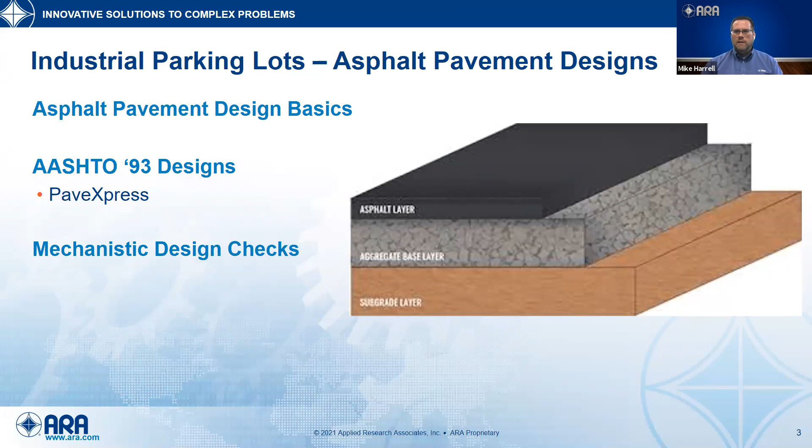And then we'll talk briefly about some mechanistic design checks that can be done to further ensure that the pavement structure is actually being designed properly and is ready for the loading that it's expected to carry during the life that it's expected to provide.

So we'll start out with a light duty example, a typical vehicle parking lot for employees at a facility. You'll see some screenshots here from the PaveXpress program available on the web, with no cost to use it. You can set up a user profile and store projects there if you want to work through them, and select different types of designs you're intending to execute, the locations for them, when you expect to finish construction, and what type of project you're actually trying to design.

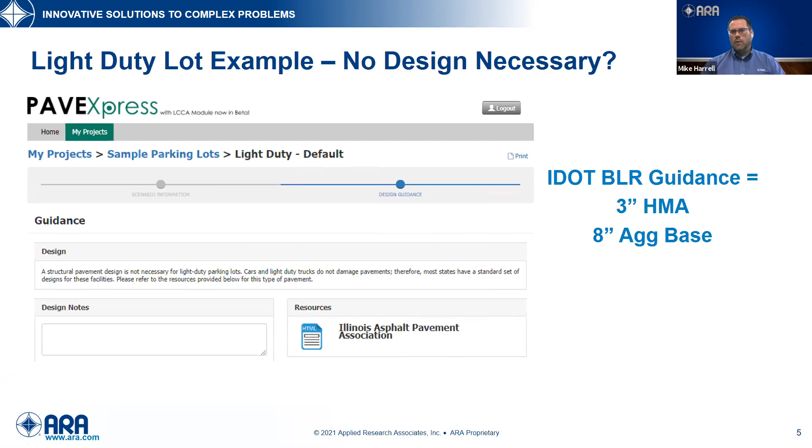So here we've selected a light duty parking lot, and the answer comes back immediately saying a structural pavement design is not necessary for a light duty parking lot, so you don't have to really worry about that. They're implying you typically just take whatever light duty lot design you had last time and push that forward. A lot of times, at least in IDOT, the Bureau of Local Roads guidance would suggest a 3-inch asphalt over 8 inches of aggregate base. What we've seen with industrial lots is that this has been co-opted for those as well, and no one's actually walked through the process of designing the heavy duty parking lot for the heavy duty vehicles it's intended to support. And lo and behold, you have a massively under-designed parking lot.

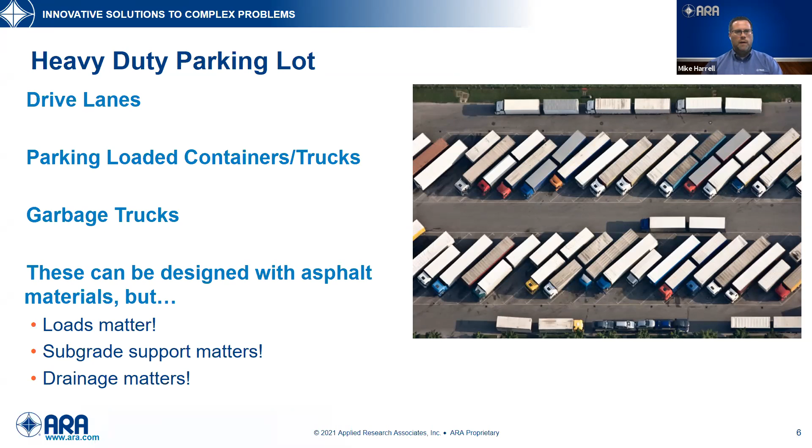So how does the AASHTO 93 procedure work? I would guess many people are familiar with this. In several states, this design methodology is actually being phased out in favor of a more mechanistic pavement design approach that takes in a lot more site-specific conditions, but it's also a very rigorous process and uses some pretty advanced software to pull those designs off. The AASHTO 93 procedure is still relevant because it's a very straightforward, fairly simple process to come up with a structural pavement design, and by and large, in comparisons in several places, the AASHTO 93 designs are actually very comparable to the ones you would come up with in the mechanistic approach.

So it's not a 100% match, but for the most part, they're pretty comparable.

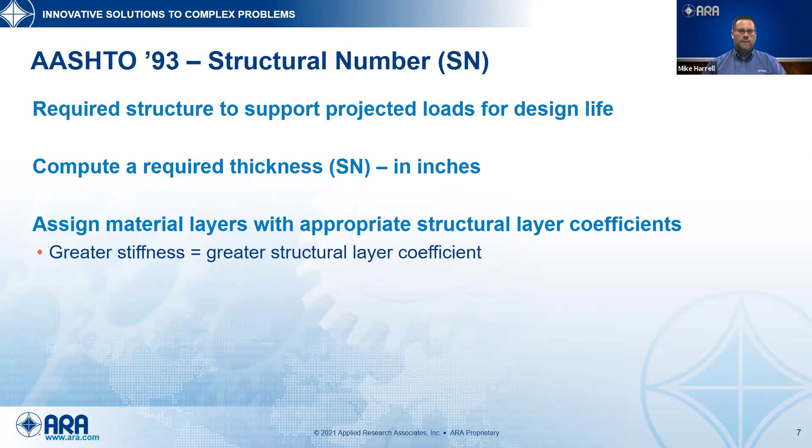So the AASHTO 93 procedure basically specifies something called a structural number. It's the required structure to support projected loads for the design life of that pavement. It requires you to compute a required thickness, which is the structural number, reported in inches. Then you assign material layers with appropriate structural layer coefficients, and those coefficients increase with stiffness of material. So a subgrade soil does not provide you any real structural benefit, an aggregate base provides some structural benefit, and a hot mix asphalt layer presents more structural support, and therefore the layer coefficients increase with stiffness.

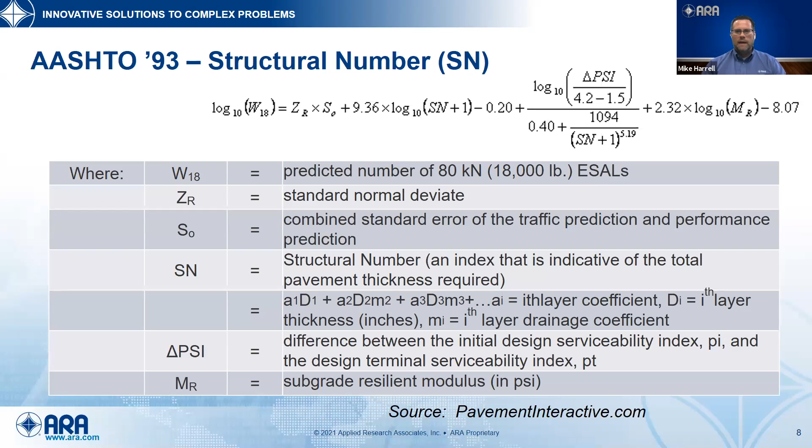So what do you start with? You start with trucks. So you hope you have a projection on how many vehicles you're going to see during the course of either a day, a week, or a year, and you can project those forward for the duration of design life you're going to have that facility in place, and what kind of structural design life you want for that pavement.

Typically, concrete is expected to last 20 years plus. You can get that type of structural support from an asphalt pavement as well, where it would only need some maintenance activities. But again, you have to design it properly.

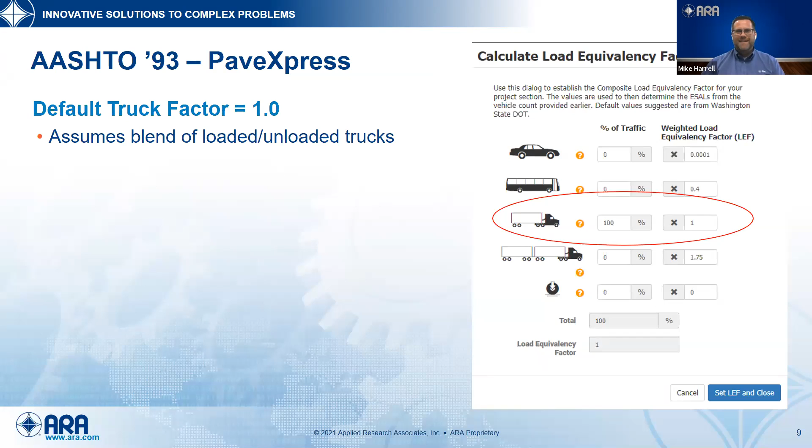So the default truck factor shown here when you enter the software is showing a load equivalency factor of 1 for a semi-truck. And that is problematic because that is not right.

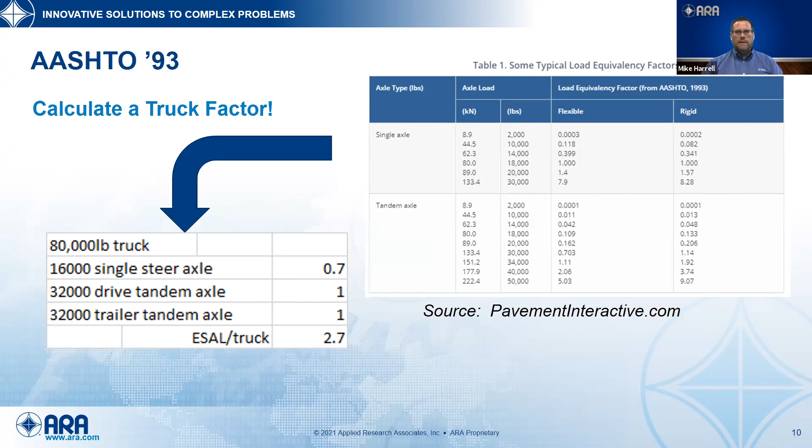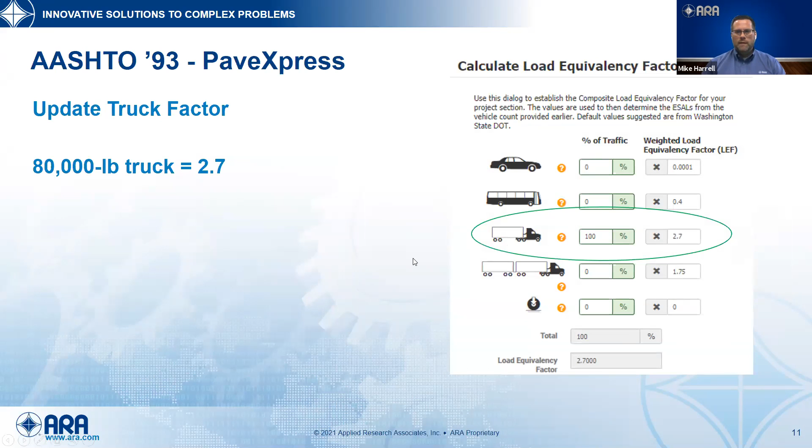And we'll see how that actually affects the pavement design process. So when you update the truck factor, as you can see here, now it's showing the appropriate truck factor for those vehicles. We can move forward through the design procedure.

So this example is going to highlight a 50 truck per day design scenario. That can definitely be changed if your facility is expecting to see more or fewer trucks. You can actually work on some blended truck traffic scenarios where if you have different types of trucks and different percentages of your overall traffic stream, you can update those appropriately.

So the next step in the design process is to start from the subgrade and work your way up. In this case, this design example was for Illinois. Most of Illinois is sitting on top of soils that are great for growing crops and are lousy for supporting structures, either roads or buildings.

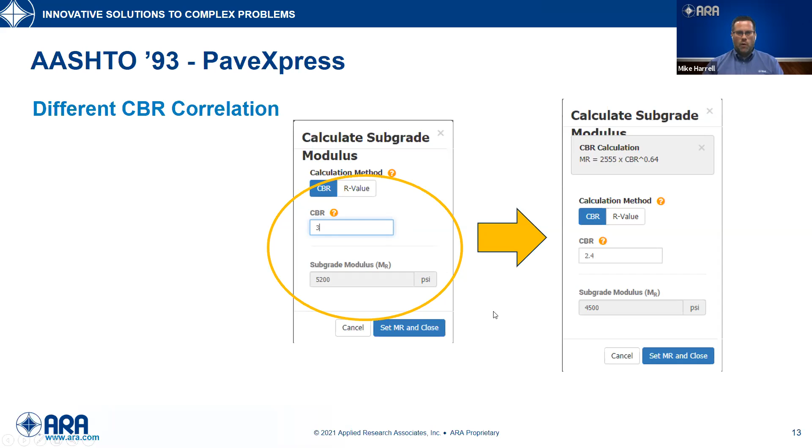In this case, a very typical clay soil modulus, or a California bearing ratio of 3, is appropriate, which will translate to somewhere between 4,500 and 5,200 PSI in resilient modulus, based on the type of correlation you use to move from CBR to resilient modulus. Those are fairly close to one another, so it's not actually that critical to choose one model or the other for that correlation.

The next step in an asphalt pavement is what's on top of your subgrade. Well, in most cases, that's an aggregate base layer. In this example, we're in Illinois, and we're talking about an IDOT CA6, or crushed stone base.

It's a very typical crushed aggregate product that is screened and accepted for quality. And the typical AASHTO layer coefficient associated with a high quality aggregate base is this 0.14 shown in the layer coefficient box on the screen. And the resilient modulus equivalent of that material is roughly 30,000 PSI.

There's some range associated with that. And then for the thickness information, you can type in a starting thickness, but you can declare whether or not you want that to be the exact thickness you're going to specify, or if you want the program to help you optimize the thicknesses of the various materials you're going to select. You can also declare whether or not you would want it to deviate from that seed value of thickness.

In our pavement design experience, most site planners would agree that a minimum of 6 inches of stone base is an appropriate way to build a foundation for an asphalt pavement.

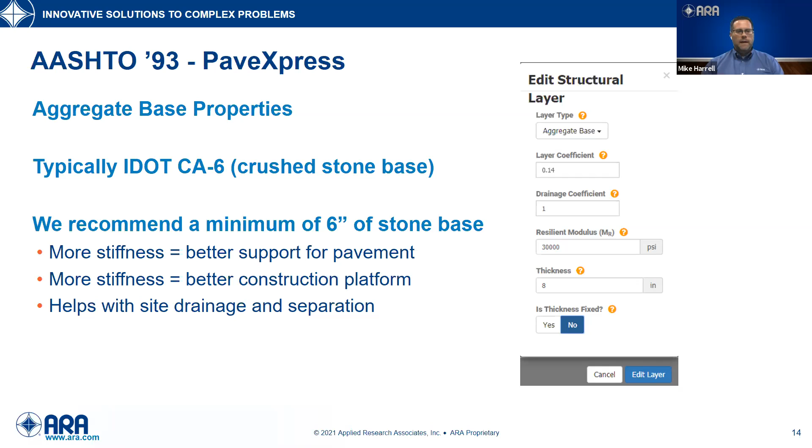And there's a couple of primary reasons for that. There's more stiffness in that aggregate, obviously, than the soil it's sitting on top of, so the stiffness definitely helps support the pavement. It also helps with asphalt compaction effort that's coming later—if you can compact against something that's more stiff, you're going to get better density out of that asphalt when you compact it. It also provides a more long-term, better construction platform, and it definitely helps with site drainage and separation of that subgrade material.

So the next phase is to move up from the aggregate, and you're now talking about asphalt material properties.

Again, a lot of times the assumption is that you're working with typical state-based highway mixtures that include quality control testing and some pretty significant laboratory control. The layer coefficients typical for those mixtures are shown here on the screen, and they can vary depending on whether you're using something like an SMA or a polymer modified binder. There are different reasons to choose different layer coefficients, but by and large, these are the ranges typically used for state type mixtures.

We'll walk through some examples here in a minute of why that may or may not be appropriate for an industrial parking lot design.

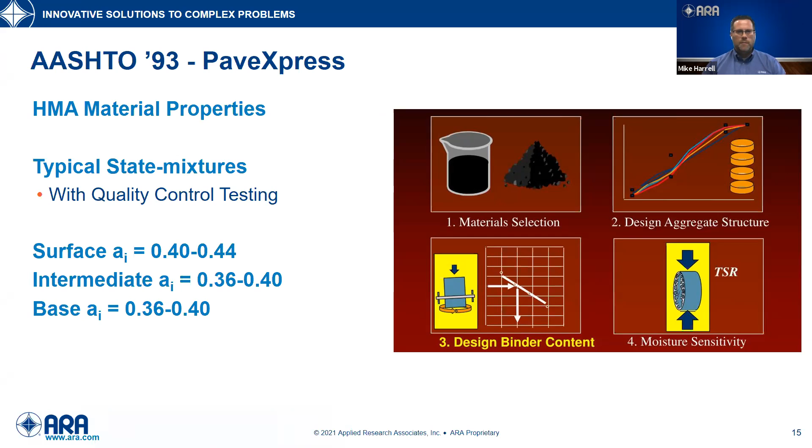So here's the result of our 50 truck per day example, and you can see it's a lot more than a 3 over 8 design. 50 trucks per day for 20 years ended up with a total of 6 inches of asphalt material and 13.5 inches of aggregate base material. So a sizably, substantially increased pavement structure compared to that 3 over 8 assumption that may have been brought to the table.

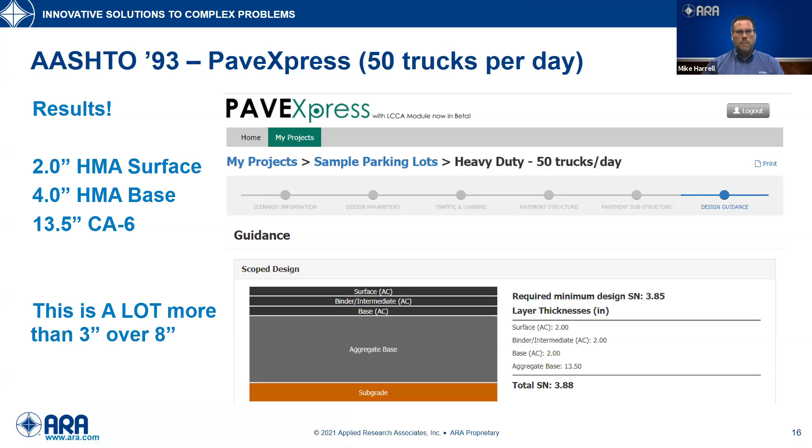This is why it's very important to actually design an asphalt pavement for the truck traffic that is going to be planned for that facility, and for the subgrade material properties that are going to be present for that facility.

Here's a chart that shows additional examples we ran through for 100 trucks per day, 150 trucks per day, 200 trucks per day, and 240 trucks per day, along with the number of millions of equivalent single axle loads for a 20-year period, the required structural number for those, and if you were to limit the asphalt surface layer to just a 2-inch layer, how the asphalt binder and aggregate base layers increase to carry those truck traffic projections. The bottom line here is that you do need a significant structure to carry that level of truck traffic.

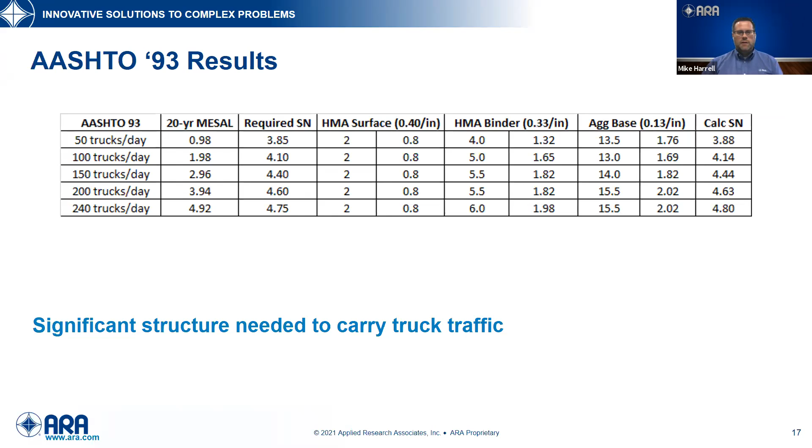So what are some typical structures that would actually be present for an industrial parking lot? We would say, in typical engineering fashion, well, it depends. And really, it depends mostly on the truck traffic loading.

If you have a bank facility, you have deposit trucks and garbage trucks that may be using that facility. Fast food lots include supply trucks and garbage trucks. Schools include buses, garbage trucks, and supply trucks for those cafeterias that may be there.

Hopefully all of these things will be in full effect in the coming months as vaccinations move out and we start to return to hopefully normal standard business protocols.

A quick quiz question for folks to think about: why does summer school matter when you're talking about a school parking lot? I'll give you a second to think about that.

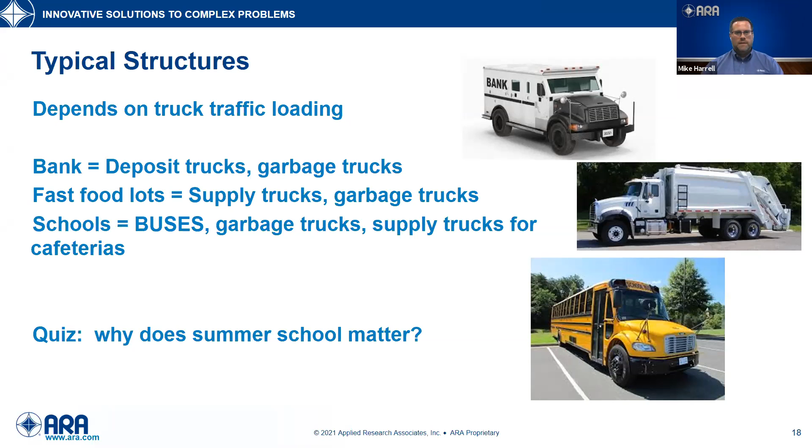I didn't put the answer up here on the screen, but the reason is asphalt gets soft in the summertime. So if you were having the same number of loadings taking place for your buses in the summer as you would in the winter, there's significantly more damage done to your parking lot pavement from those summer bus loadings because the material is softer during that time.

So if you're going to have a spec design, if you're building a facility where we don't know who the end tenant is going to be, it's good to design in advance and to think about the potential use of some industrial, heavy vehicles traversing those lots.

Theron and I were talking about this, and we kind of keyed in on that: if you're not going to know who your end tenant is, it's really good to plan for at least 50 trucks a day. That gives you a lot of safety factor on the use of that facility whenever a tenant is going to take it over. You don't have to worry quite as much about that pavement failing on year one and making your facility developer look bad because they didn't plan for the right type of parking lot.

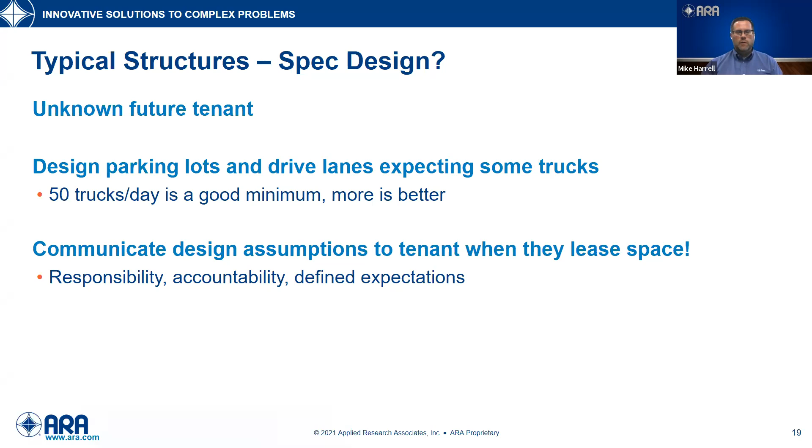Within the PaveXpress tool, you can actually perform what they call a structural analysis. It's also considered a mechanistic design check, where you look at the stresses and strains that are projected or predicted to take place at the critical layer interfaces of that asphalt pavement.

Really, you're talking about two main failure modes with asphalt pavements. Those are rutting, developing into subgrade material, or fatigue cracking, which develops starting at the bottom of the asphalt layers and works its way up. Those are very critical real failure distresses that can take place in an asphalt pavement that require full depth repairs to overcome.

Lots of other asphalt distresses are superficial and can be dealt with either through traditional maintenance activities or even a mill and overlay, but you really want to avoid those full depth failures. So that's what this process is all about - going through the rigor of actually looking at the mechanistic design checks to ensure that the stresses and strains are where they need to be in order to project the loadings are sufficient for that pavement.

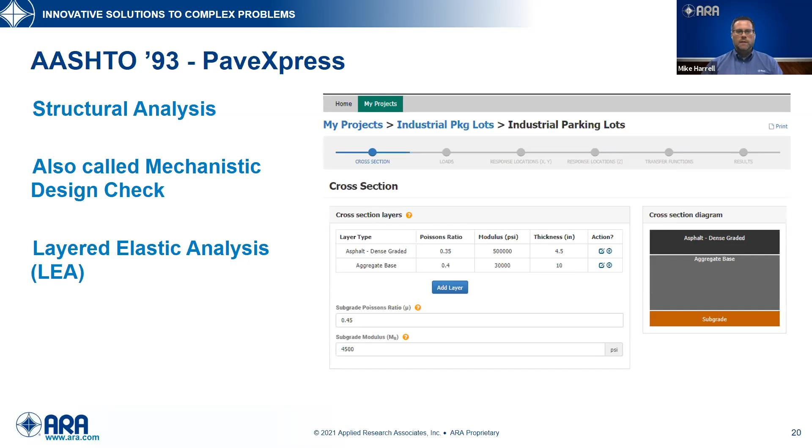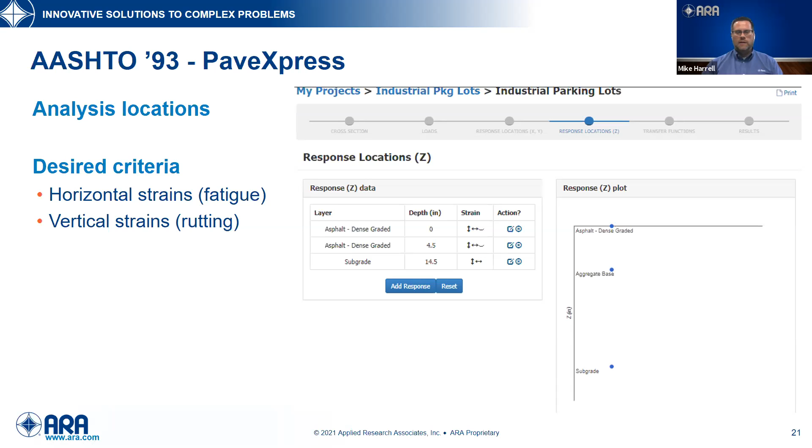Again, I was talking about the analysis locations and the desired criteria. So you just specify where the layer interfaces are going to be based on the pavement structure that you're looking to evaluate. This is not one that's trying to optimize the layers - it's actually looking for you as the designer to input the layer thicknesses and therefore the interface locations for the analysis to take place.

It's something that's out there. It's good - it's a good exercise to do to make sure that the asphalt pavement design is designed properly. I just wanted to make sure that everybody was aware of that.

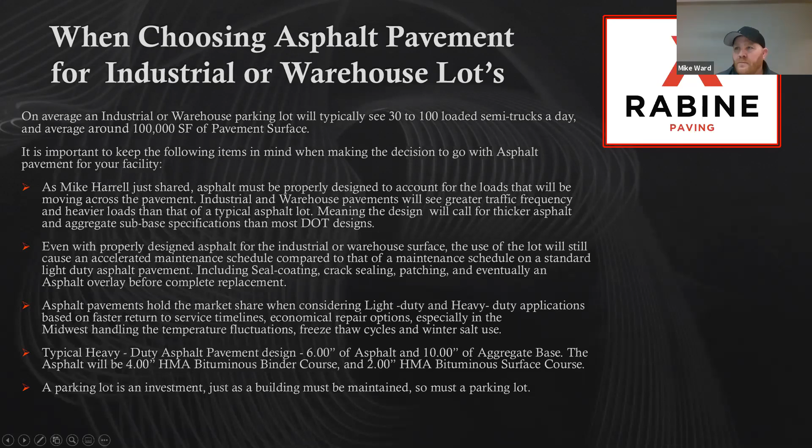So what affects the pavement life cycle? How long the pavement will fulfill its purpose depends largely on the initial construction, starting with the design and then obviously the installation.

Every design is unique to the location, the area, the usage of the lot itself, and the traffic patterns. Starting from a template for an approved design, each design needs to factor in outside impacts specific to the location and facility operating needs. On our end, in any tight quarters with a lot of turning trucks, high traffic, and unloading areas, we would look to utilize a concrete pavement as opposed to asphalt, just for the wearability factor.

The design should include sufficient base support and the proper asphalt depth. The entire structure would be at risk for early failures if it's not designed properly and we're putting heavy trucks across those areas, turning and parking, such as trailers on the surface, exposing the pavement to moisture and liquids.

If we don't have good drainage and can't get the water to cross, we're going to have pooling. Pooling will then force freeze-thaw cycles to take place, which will cause early failures and increase the amount of maintenance required on the site.

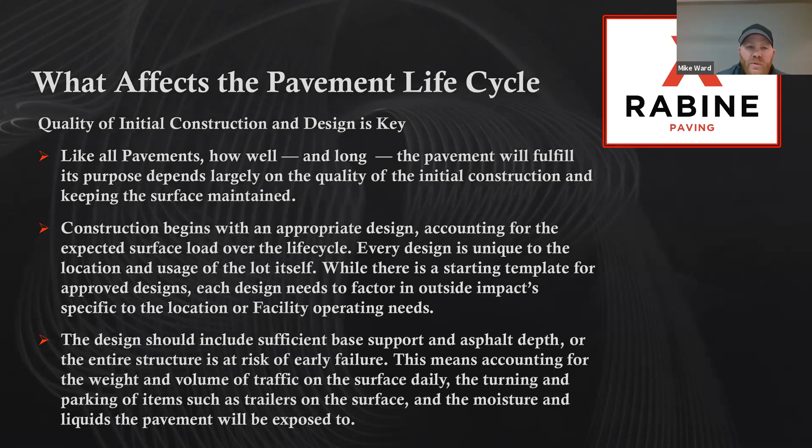So how long will that parking lot last? Well, we're looking to design for this context a 20-year pavement, so we definitely want to make sure we use the proper base course. You'll typically see on an industrial parking lot like this that we can get 15 to 20 years out of that pavement design.

If we're doing asphalt pulverization, where we're intermixing the existing aggregate base into the old pavements, I think we see a little bit less of a life cycle on that, especially on heavy duty pavements, where you increase the amount of deflection we see. Asphalt overlays, generally, as long as the base is intact, will last an additional 8 to 12 years.

Just a tidbit to throw in there, we figure 30 to 40% of the total surface area requires substantial removal, just for bringing in the right size equipment and doing the patches, also to make sure the area is beyond or outside of the damaged sections. Generally with asphalt pavements, the base materials that are left will also have some damage, so once we get to 30 to 40%, we're looking to do a full resurface.

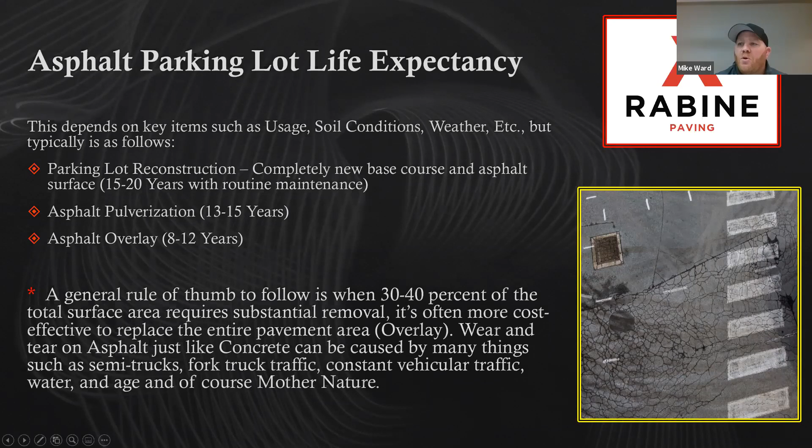So the 5 stages of an asphalt pavement: Stage 1 is obviously a new pavement. We generally would prefer that be a 1 to 5 year category, during which we're going to see some general maintenance.

Stage 2 is the preventative maintenance stage, especially in the Midwest. That's where we're going to be doing some crack sealing, potentially seal coating, and generally some restriping. In a 5 to 7 year period on these types of pavements, we wouldn't expect that we're going to be doing much repairs.

Stage 3 would be minor repairs, years 7 through 15. We're going to get a little bit more, probably crack sealing, and we'll have some deflection that shows up in the surface of the pavement. At that point, you can do a refresh of seal coating. You're probably going to start to see some minor pothole repairs, and things like seam rutting and shoving in the 7 to 15 year period.

Stage 4 is major repairs. We're probably going to be doing some full depth remove and replacement. This could be right at the seam edges hitting concrete aprons, the aprons coming into the facility, or heavy turning radius sections - larger wear and tear sections. Depending on the level of maintenance the project receives in the initial stages, that's going to lead to what that is.

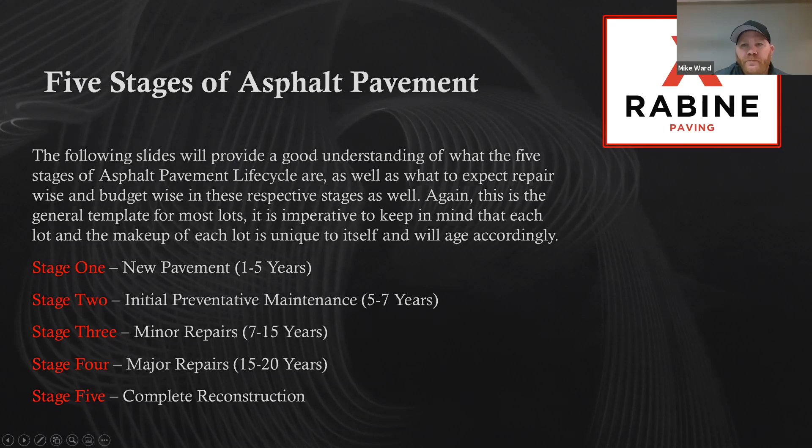New pavement goes in looking nice and clean, black, with fancy striping. It's nice and smooth for pedestrian, car, and truck traffic. This saves facilities a lot of money, reduces wear and tear on vehicles, and has a clean look and appearance that will generally last up to 5 years with very little maintenance required.

Seal coating is kind of along the lines of interpretation. We generally recommend, structurally, that you seal the application twice. After that, it's basically up to whenever you want to make the property look new and clean.

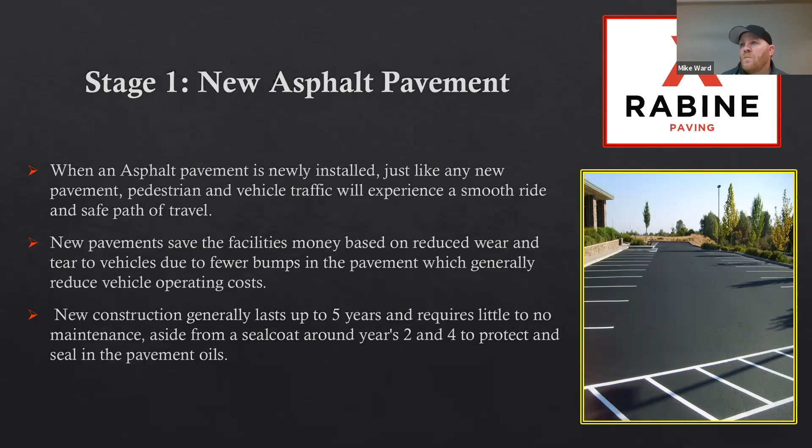In Stage 2, like we talked about earlier, we start to see more freeze-thaw movement. We could see some deterioration around asphalt seams, cold seams, and construction joints, so generally we'll see hot tar crack sealing at those areas.

Our goal is to get in and open up those sections so that they will receive the joint sealer, much like a concrete pavement. The goal is to seal off all those joints and keep the water out of the subgrade and subbase, which in the winters is where we start to see most of our damage on our pavements.

Again, seal coating should be done anytime after the first 6 months to the first year, and then we generally recommend the second sealing 2 to 3 years after that. After that, it's strictly for appearance.

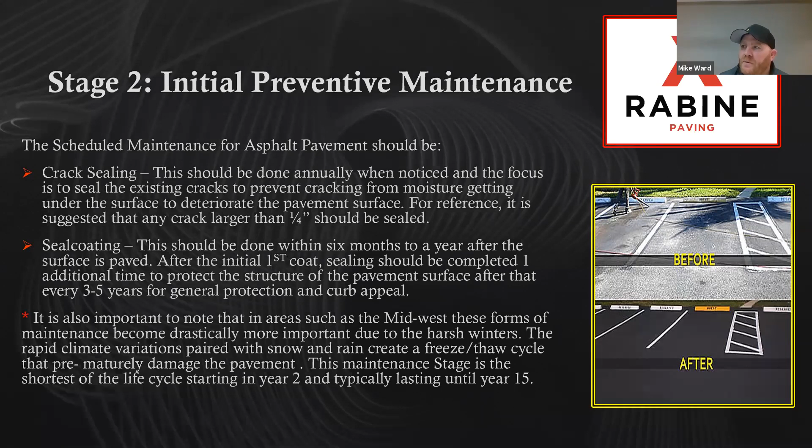In the Midwest, certain forms of maintenance are important due to harsh winters. The rapid climate variations paired with snow create a freeze-thaw cycle, so basically those preventative maintenance measures will elongate the life cycle of the pavement, as long as you're doing the base remediation.

At the end of Stage 3, we start to see where we're doing some patching - minimal patching, potholes, structure adjustments, cracking, and seam raveling.

We do both pavements again, as I referred to earlier. In the last few years, I think we've had a break with the number of structure repairs we've been called out to do in the winter on both concrete and asphalt pavements. But about 2018, I think we did 180 through the winter - grinding down high spots and putting back together damaged drain structures from freeze-thaw cycles.

This year we hit another big freeze-thaw section through early January, and we were right back doing the same thing again. So it's very important to keep the water out of those pavements. That's generally where we'll see most of the work in that early stage.

Again, the second coat of seal coating is usually done in Stage 3, and that should seal off all of the remaining pores in the asphalt. We're looking to keep all of the oils in the mix and keep that mix flexible instead of drying out. That's obviously one of the goals, to keep that pavement lasting a long time.

Most of the time on these patches, they're going to be small patches. We're going to saw cut, remove, and replace. We're looking to get a clean joint, and again, we want to keep the water out.

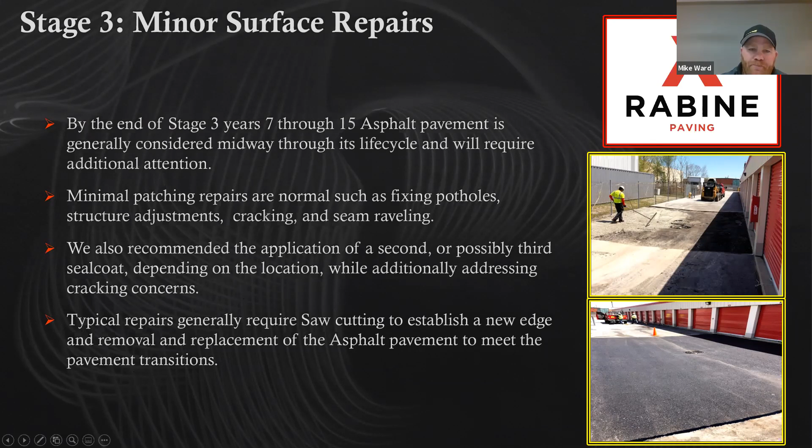Stage 4, major repairs, years 10 through 20. Again, just like with anything else, the maintenance that you do on your properties in the beginning is what's going to give you the overall life cycle. There's no difference with that. If you neglect the pavement, whether it's concrete or asphalt, you're going to have more problems long term.

So in this stage, we start to see areas that we talked about earlier - heavy traffic areas, sitting areas where we have water, things like that. We're going to have to probably come in and do a little bit more than a general patch, addressing potholes, block cracking, and alligator cracking.

Water and ice in this world are 2 of the most destructive elements to pavements, and obviously they can turn small cracks into potholes very quickly.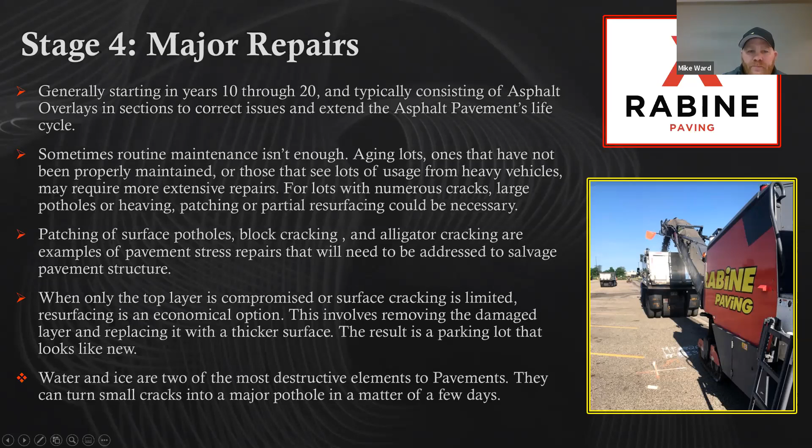Stage 5, complete reconstruction, would be the last stage, years 15 through 20. That's usually when the surface is in complete disrepair. Removal and full replacement could be necessary of the pavement areas. If the sub-base was installed correctly and we're keeping the water where it should be, running across the surface and not in the ground, generally we shouldn't have to be repairing the subgrade again.

But due to repeated temperature changes, freeze thaw in the Midwest, these definitely are in that 15 to 20 year period. You're going to have some larger patching that you're most likely going to have to do. When this happens, the old asphalt's removed, the parking lot's completely regraded, compacted, and then you're starting back over with anywhere between a 5-inch and a 6-inch asphalt pavement.

Proper maintenance, assessments, and repairs are essential in sustaining pavement life cycles. As we mentioned earlier, asphalt patching in drive lanes and corrective measures around storm structures will obviously prolong the life cycle of the asphalt pavement.

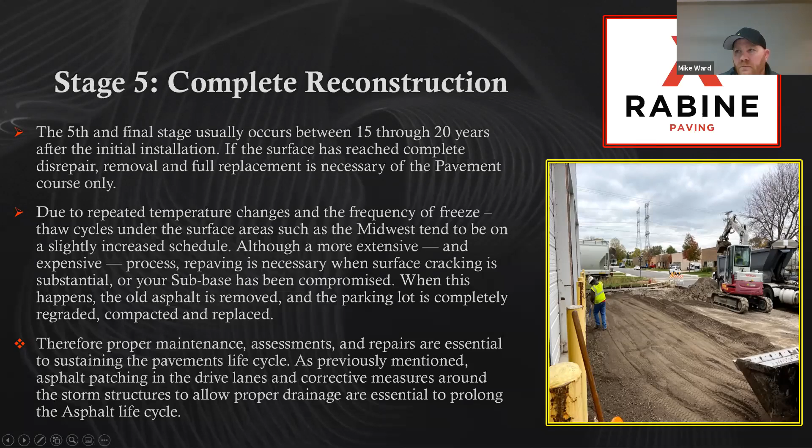Alluding to what we started with earlier, the warehouse lots, or any of the larger lots, if we generally want to say 100,000 square foot or more, the asphalt, the 6-inch pavement, 10 inches of base, is going to give you a properly designed pavement for the truck traffic.

So when we talk about the cost that we look at for an asphalt pavement, if you were to generate a budget, and this changes a little bit through the area, I use 10 cents because I see that average in the Midwest region around here. Starting in year 2, you're going to look at a 10 cents cost per square foot for a seal coating. In year 3, on a 100,000 square foot pavement, you're probably going to see generally around about a $1,500 cost expenditure for doing some joint sealing.

Joint sealing can be anywhere between as low as 75 cents a linear foot and $1.25 a linear foot. That just goes back to, again, I would tell all of our customers to spend the money, that small amount of money, to obviously get the full life cycle out of their pavement. Starting in year 5, you want to plan to spend around 5 to 10% of the lot at $3 to $5 a square foot.

So at the fourth phase of the pavement, generally, a $3 to $5 is going to be your 2-inch mill and resurface, which should also cover the cost of the full depth patching that could be done in some sections. Overlay and resurfaces of the top 1.5 to 2 inches happen in years 12 and beyond.

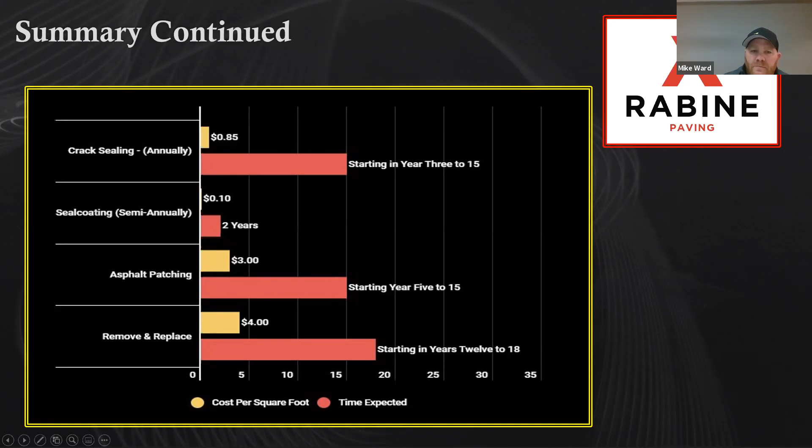We use the PCI index for all of the projects that we work on for the larger warehouse projects. So generally when we go in to look at the pavements, we ask the customers about their interpretation or their expectation of their pavement, how long they want it to be designed for, how long they want to see it perform, and then work backwards to establish budgets. The PCI is a good tool that we found to better generate and understand the client's expectation and then the cost for budget.

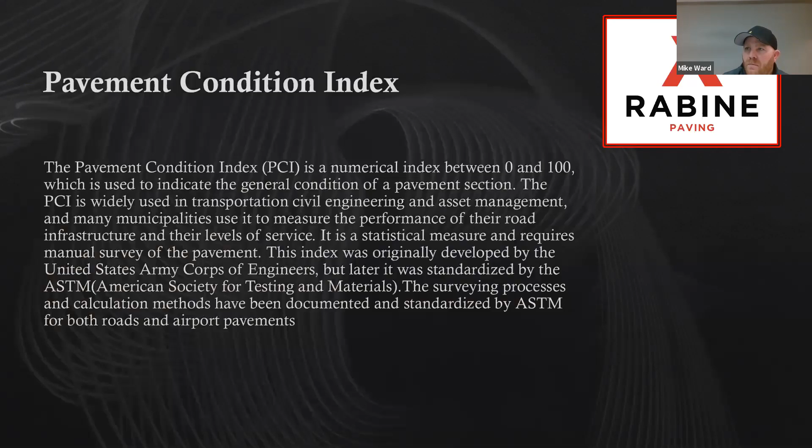A lot of the things that the PCI index uses, especially on asphalt, it'll register points for bleeding, block cracking, bumps and sags in the pavement, alligator cracking, depressions or pothole areas that hold water, edge cracking, joint reflection, lane and shoulder drop off, which again, is something to address and should be designed properly, but as long as the water drains off, then the pavement's going to work on a much better level.

Longitudinal and transverse cracking, low ride quality, patching and utility cut patching, polished aggregates. You'll start to, on a high traffic area, see the surface get honed down. Generally in the winter or in rainy times, you'll have a little bit more of a slippery pavement. Potholes, again, rutting. Generally we'll see those in areas where maybe at a guard gate or a staging area where the trucks have a large frequency of starts and stops.

Slippage cracking would be unbonded pavement, swelling, and then weathered or raveling asphalt, which is just going to happen through time. So those are generally a really good tool to utilize to be able to design the right pavement and make sure that the pavement you installed is performing at the expectation it was bid for. So hopefully, as I stumbled through this presentation, you guys learned a little bit about asphalt and the differences in how that's going to be constructed over your concrete pavements.

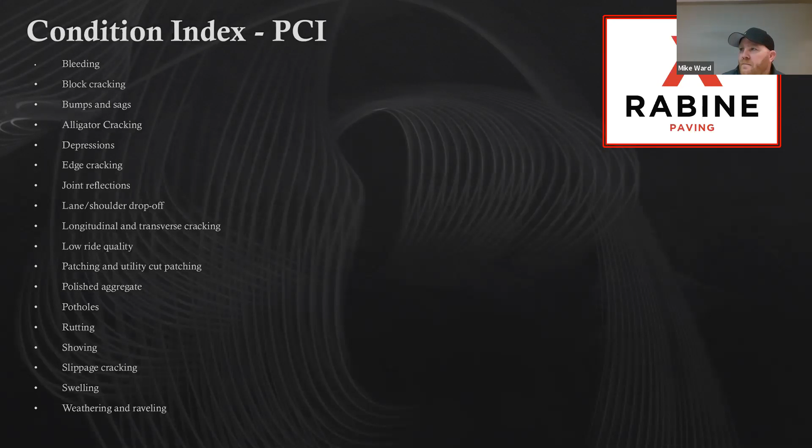Thanks, Mike. Great job on your presentation, both Mikes. We're going to start reviewing some of these questions. We had a lot of questions come in. The first question is to either Mike: Is a 2-inch minimum recommended thickness for a surface course?

I would only say that in this application, dollar for dollar, you would be better off to spend to get the extra half inch for the life analysis, I think, over the half inch in cost. Yeah, what Mike Ward's saying, it does somewhat matter on the aggregate gradation that you're going to select for that surface mix and the appropriate thickness for the layer thickness that would come from that. 1.5 inch upwards of 2 inches are typical surface lift thicknesses. A 2-inch surface, I think, is better than 1.5 inches. But if you've got a 1.5 inch lift because of the materials that you have available, that's not the end of the world.